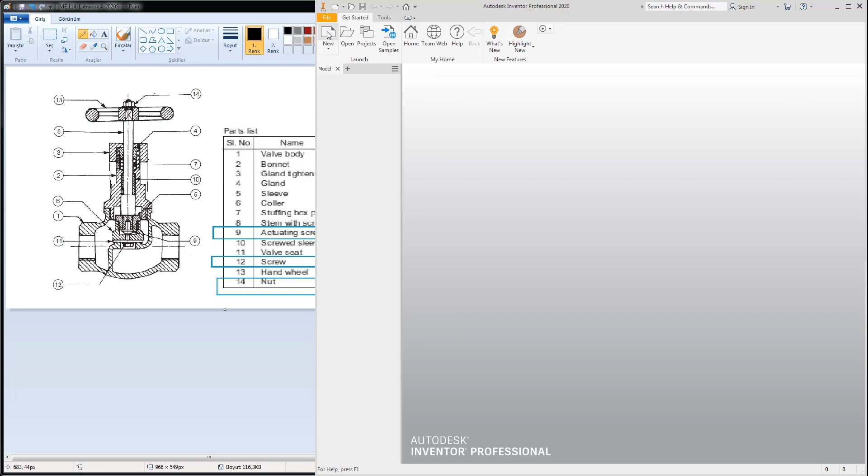Okay, the next thing we are going to start the assembly modeling. We have just finished all the parts. From this point in Inventor, I start a new assembly file, which is a standard millimetric IAM file.

Select this one and hit the create button. From the first assemble, use the place command and find your part files. My files are on this folder, and I will just select my parts one by one by pressing the control button.

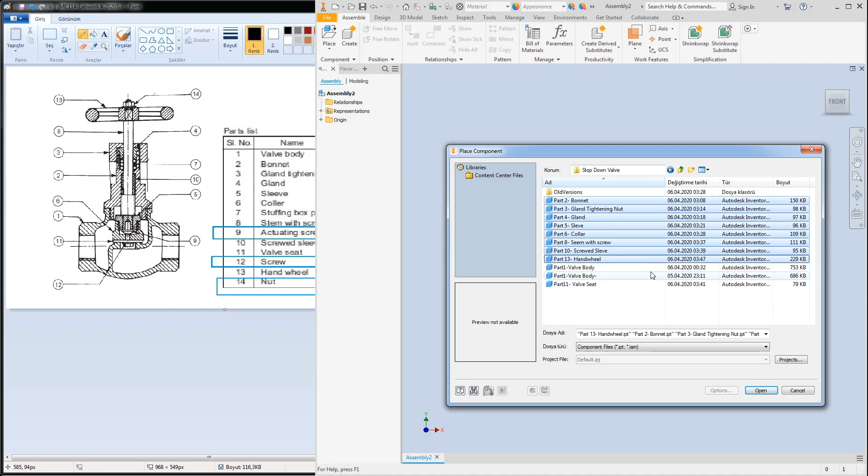Okay, hit open and select with right left click and escape. We have one copy of the parts here. Next thing, the first thing in the assembly side, we have to just make one part grounded first.

For this, I will just make this valve body. You can use right click and hit grounded, or use the feature window and hit the ground. Now I'm going to just fix this part.

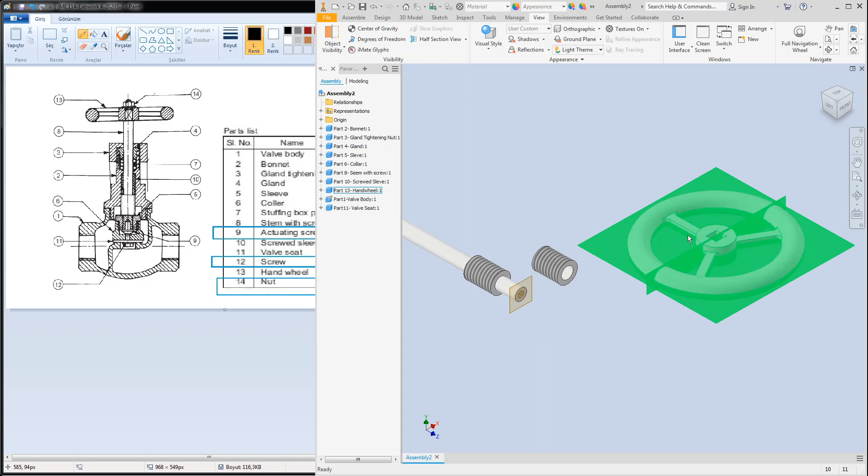As I have told before, most parts are cast iron parts, and also I'm going to make different colors. Before this, I will just change my point of view style to shaded with edges, to see the edge connections. The next thing I'm going to do is assign the materials.

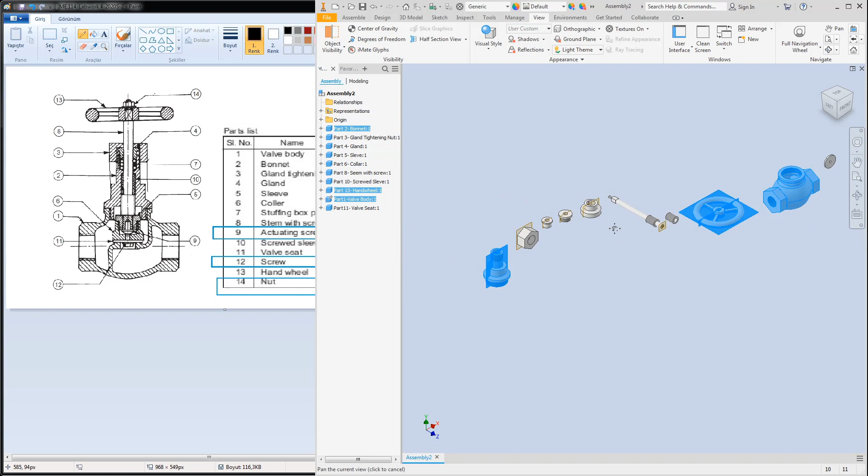For example, the body part is probably made up of cast iron. Also the hand wheel, these parts, the bonnet part here, and the other small parts are probably not cast iron, but normal steel parts.

I'll just go assign iron cast parts. When I have changed the material properties, it automatically grabs the colors.

I will just change the material colors as I wish. Yellow, that's this one, red. Also make this shaft green.

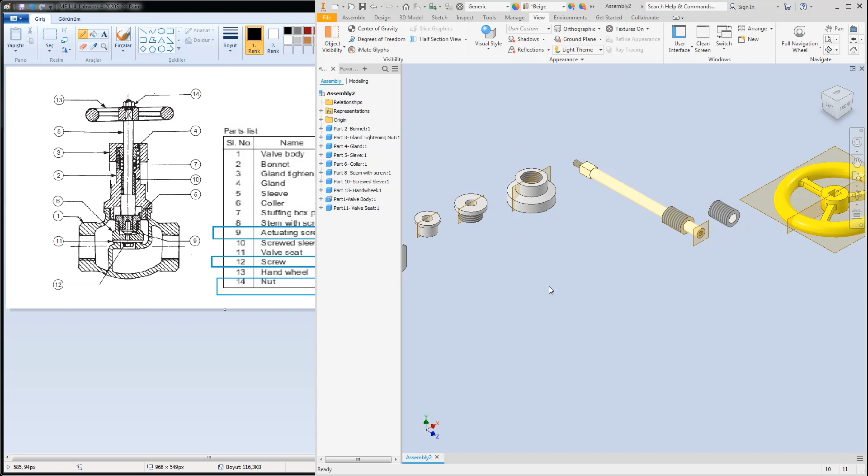Good, I'll just select beige. This one, orange. I'll just change the colors and I'll assign the other materials still.

Let's make these parts made up of normal steel. Okay, and change their colors afterwards.

White. This one, gray. This as well. Light red, let's say. Pink. Yes, so this one.

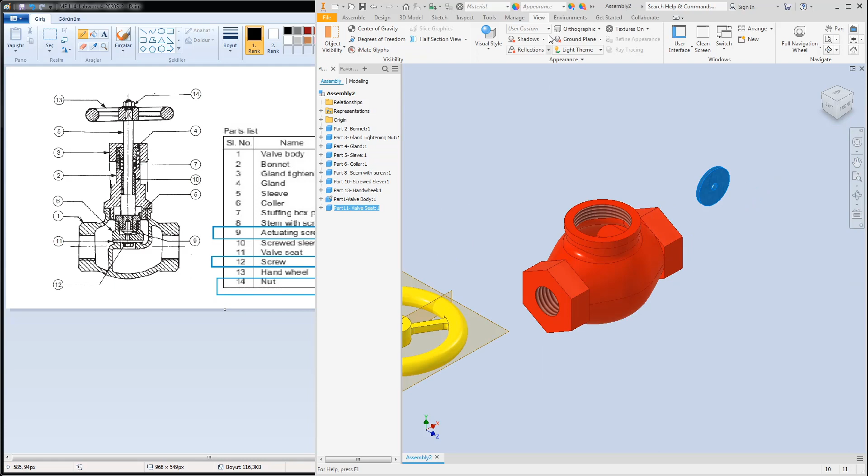White, or violet, no problem at all. This is the normal default, let's say, gray color.

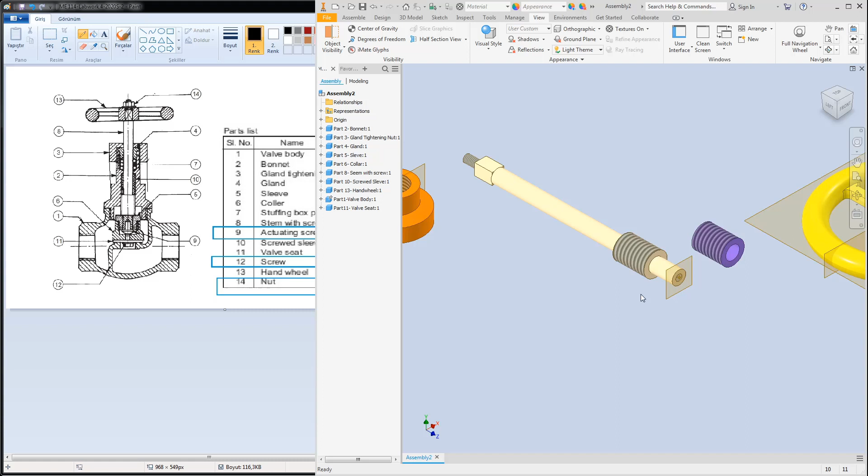Okay, we will just construct the groups first. As you see, we have the first body part, and after this one we just combine the parts on and on after. Here we have a part at this point which is connected to the first stem here with the collar part, which is this one, and we will combine these three parts to each other.

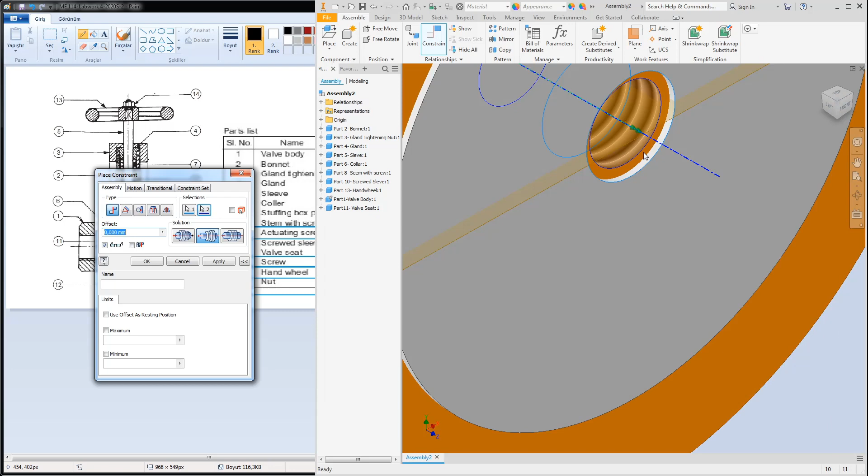Let's have the assembly constraint. Make the axes to each other. I'll just make also keep this axis to this axis like this. Make combine.

Inserting to each other, which is this surface. Again, this is our solution with the flush, which is inside. Also, I'll just keep these surfaces against each other.

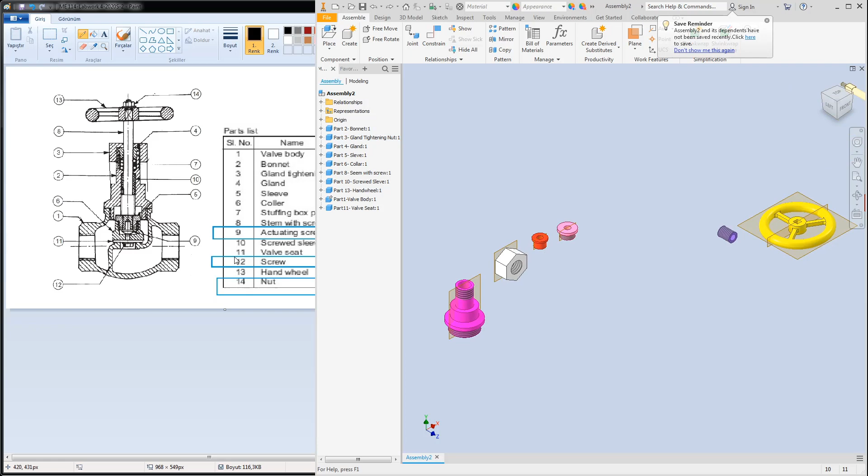Okay, I think we have a problem at this point. Yes, I'll just correct the first thing. Okay, yes, we have the number 5.

Let's look for it in detail. I'll look at the number 5 on this. Look for the part 5, the sleeve. Now just insert this part file.

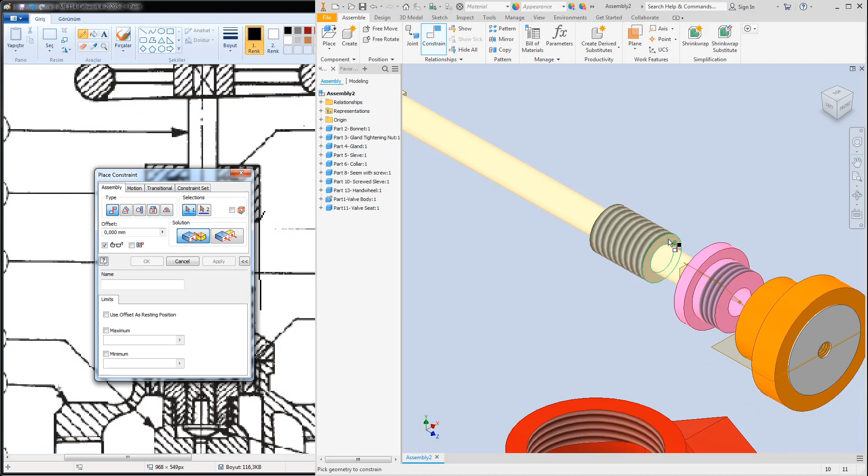I'll just change first, rotate this part around this axis and insert it, mate these axes to each other, and I'll just make the seating against these surfaces.

Also, I will insert this surface to this surface like this. Also, I will make this surface mate it. Okay, I will also use this axis to mount on our body axis.

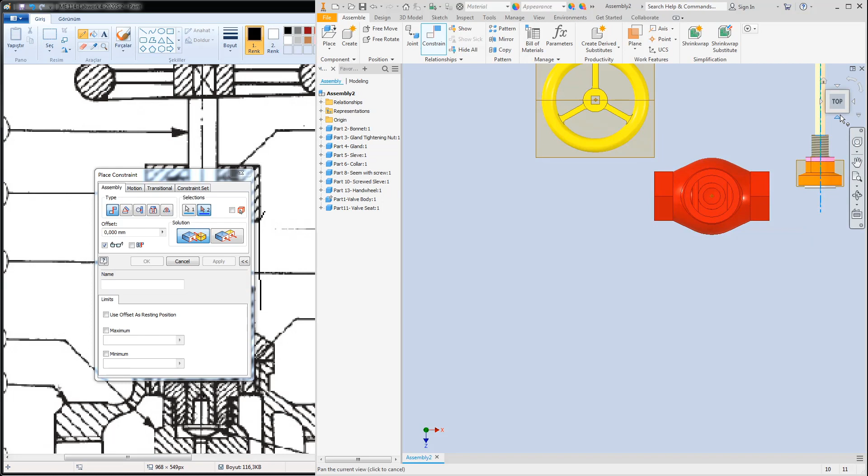Which I can see maybe at this point. For this, I will just look for it and open the XY plane visible to make a sectional cutout view.

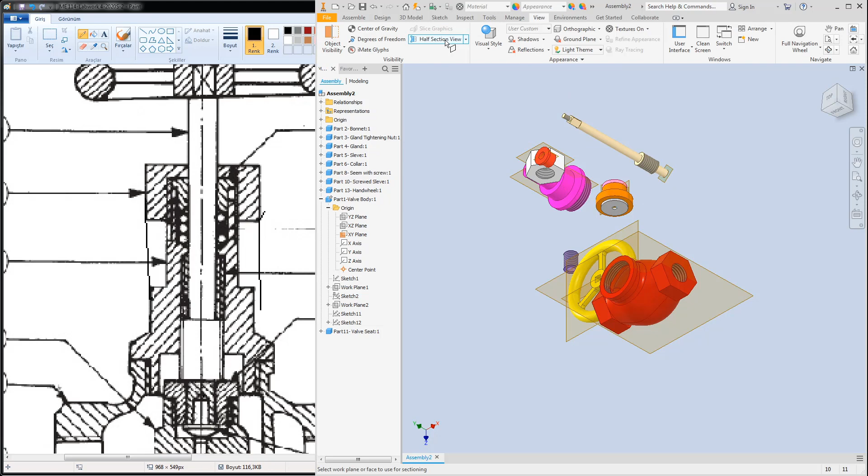From this point, I will just rotate this group around this axis with escape, hit the up, rotate this around this axis, and make the half section view up to this point.

And to see this axis, make the constraint this to this. Okay.

Here I have most of the assembly at this point, which is inserted at this point. As you see, I will just move at this point. I will just limit the seating position with the limits maximum, which is 5 mm.

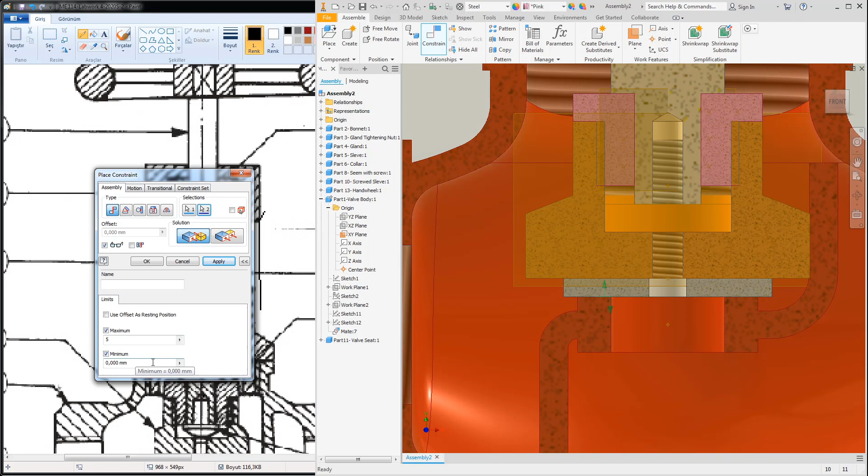It was mentioned in the beginning of this video lesson before, and make these conditions, and this is mated 5 mm in distance. Okay, we use this section, please enlarge your assembly constraint dialog box here.

Okay, the next thing we have the sleeve inside here. I'll just make the other group inserted to each other.

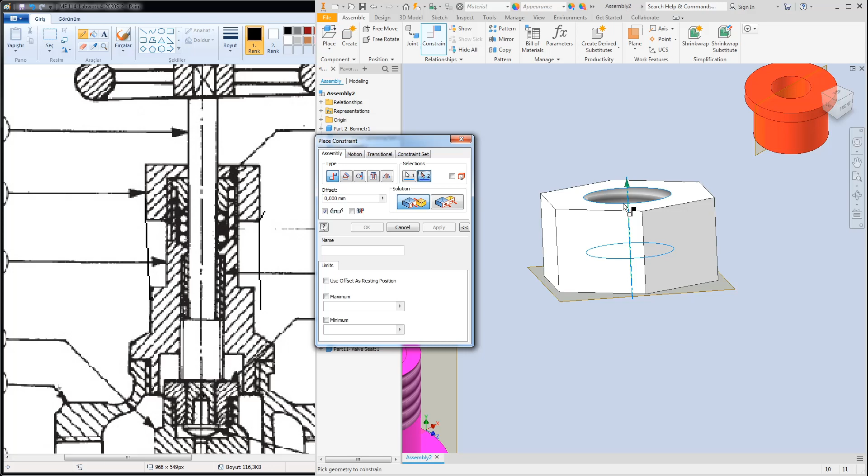Also, I'll rotate this cap, rotate or escape, and make these two axes mated to each other. Also, I will make these two axes mated to each other.

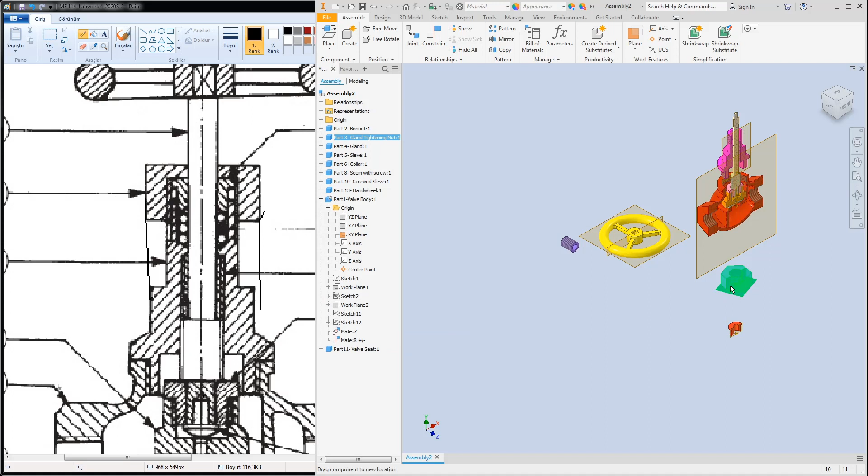I'll just use the same axes. Also, I'm going to use, I will just stick this axis to our part axis. As you see, we just use and move the parts this way.

Okay, also we have sleeve part. I'll just adjust to this part here. Next thing we have, and this axis for hand wheel, and we are going to just adjust from the top side.

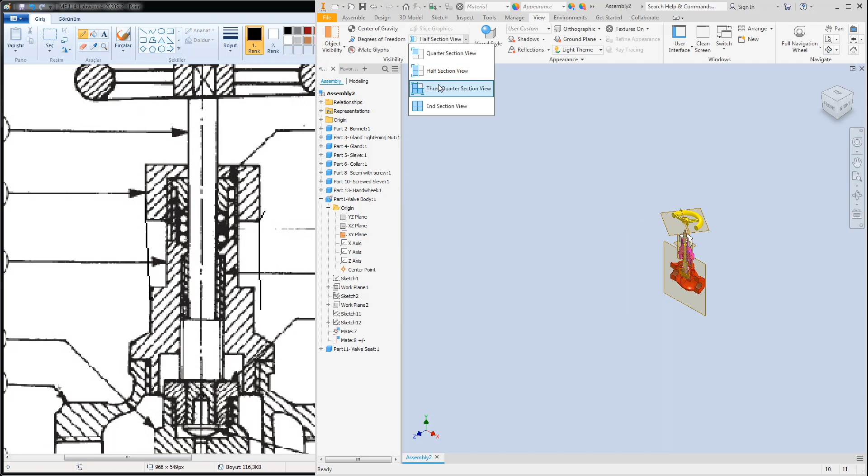Let's begin. Okay. We have the parts so far. We haven't left, I think, to just check if we have left any part from the other side.

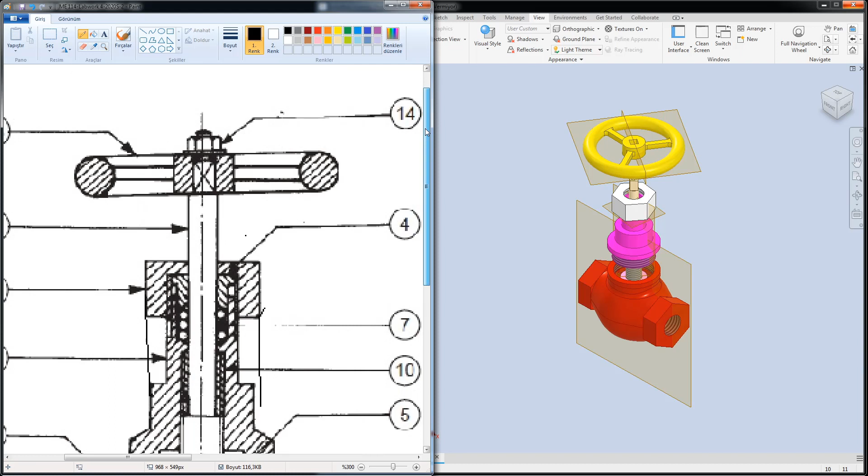Next thing, the first thing, from the top side, I will just begin to mount on it. We have a square here, and we have a hand wheel. I'm going to just make the first connection.

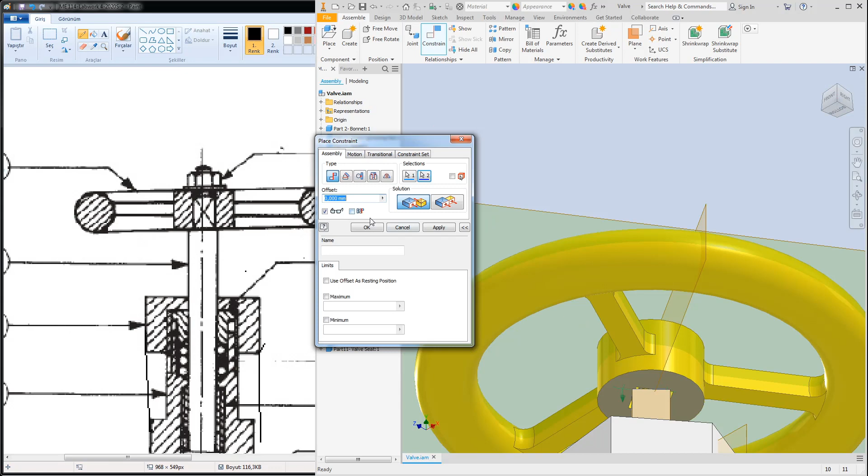Have the constraint tool, select this surface, have the back surface of the hand wheel. And also we have a rotational constraint. I would like to rotate with these two.

As you see, we have from the top side, it is not truly mounted, I think, because yes, as you see, we have missing constraint. I would like to have the inside faces with outside faces. I would like to have the angular constraint to body section.

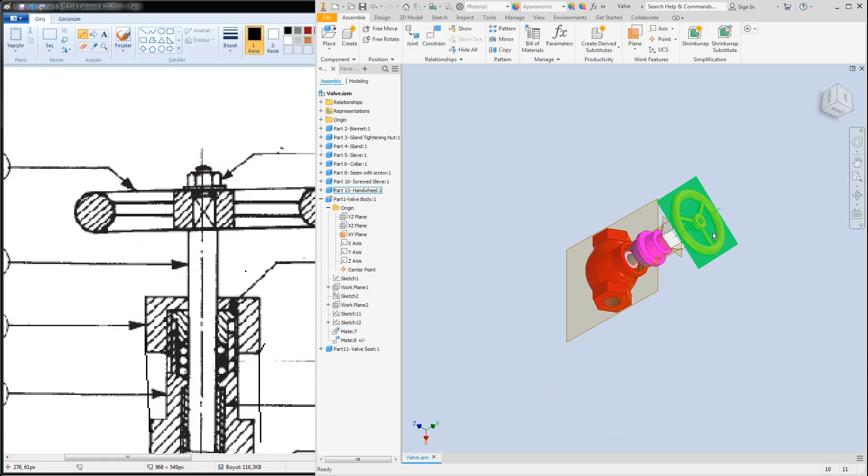Yes. This time our shaft is just turning with this two body part, as you see here. Okay.

I'll just turn this one. Also, I think I have made a mistake at this point. I'll just look for the hand wheel and make this deleted because I would like to use the other side, or make this move a little bit higher than this one.

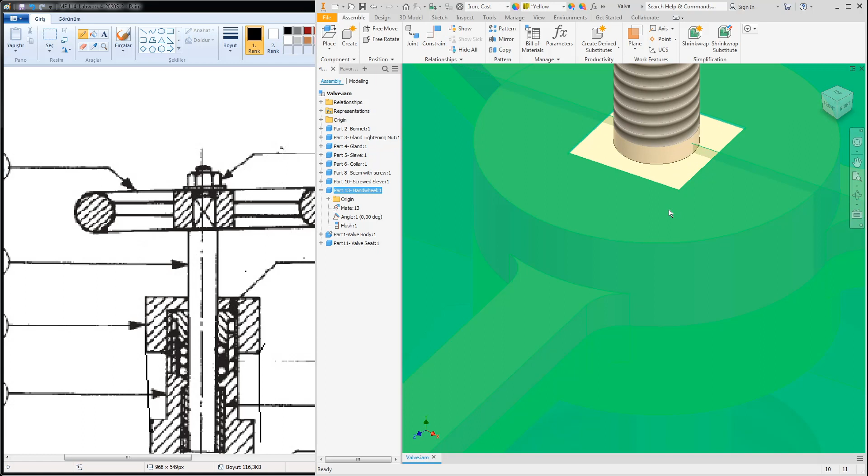Yes, like this. For this, I will just keep the surfaces flushed. These are turning together this time. We also have a washer.

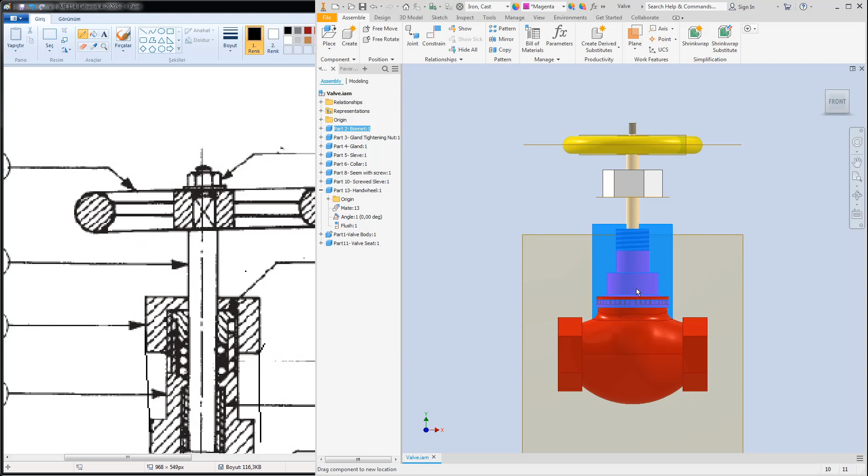From this point, we have made this group. We will just insert this gland packing. We have a gland part which is just the number four. I'll search that part by having a section view which passes through XY plane. Search the number 4.

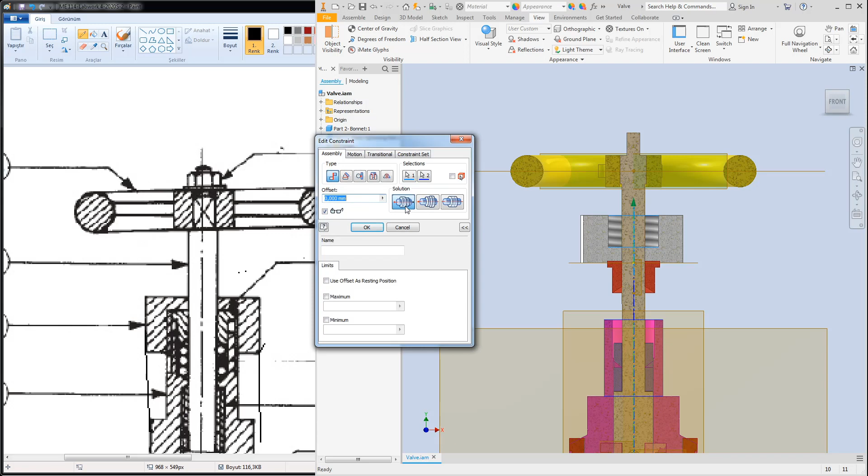Here it is, backside of this part which sits on this view. The cap, I have to just turn this cap on the other side. I will just change and edit this on the aligned version. Yes, and I will just make this blend straight on the back side of the part.

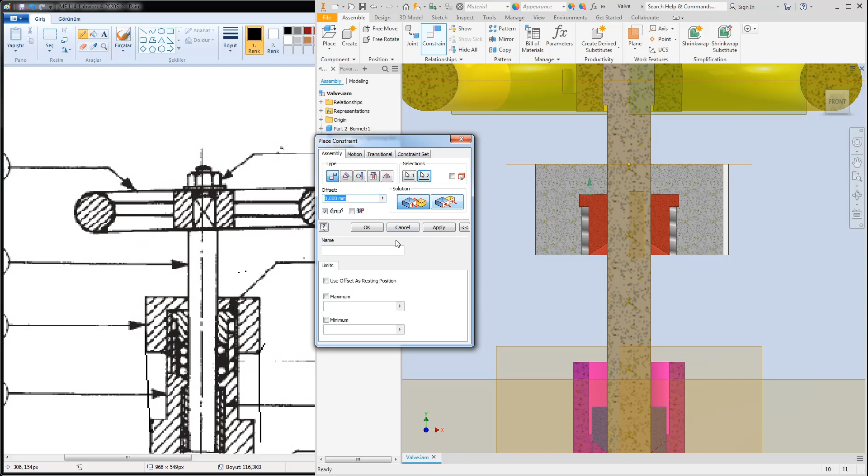For this constraint, I use the opposite surfaces. This surface will be opposite to this one, and I will just make the packing here, the number 2, the number 3, and with the number 4.

Let's go downside. We have a part 7. We are not going to make this part, but I would like to have that part in the part list. For this, I'm going to make an empty part, standard mm, and name it as a phantom part, which is stuffing box packing.

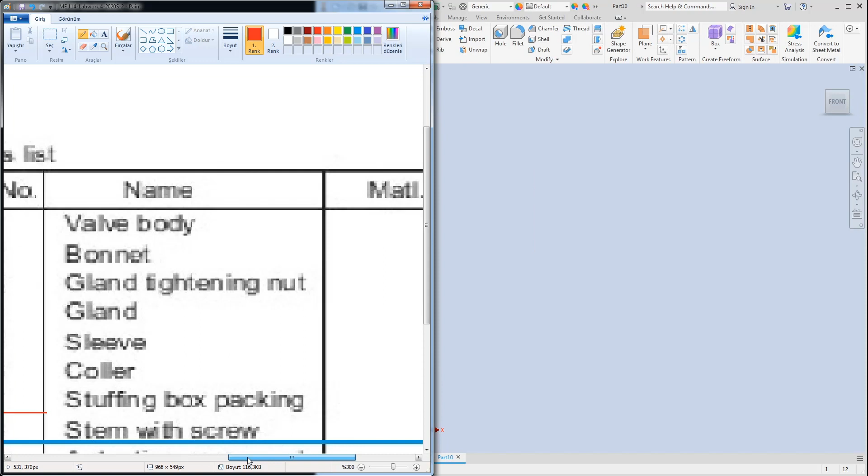Save this file with part 7, part stuffing box packing. Okay.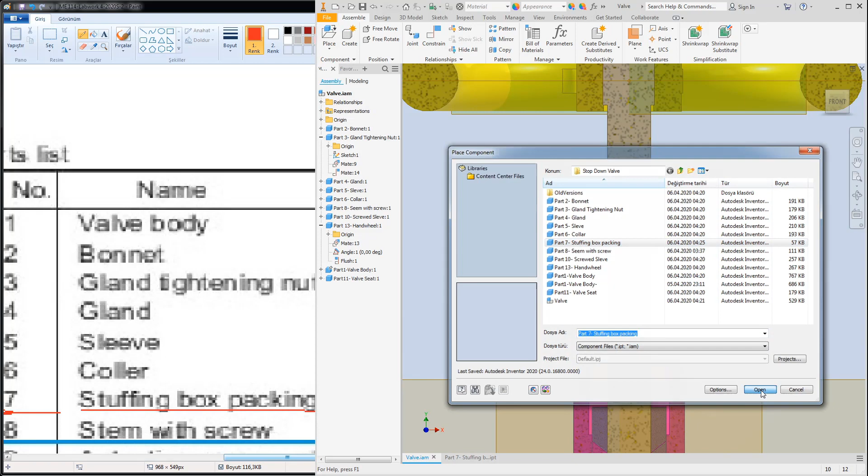Again, let's save this part file, open the valve assembly, and bring that part file also from place command. Although it's empty, just place with escape and save your part file. Assembly file, I'm sorry.

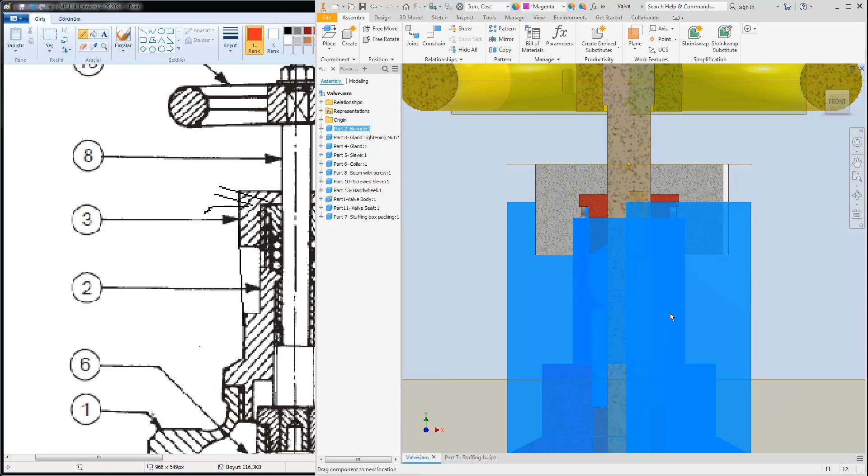After this one, we have the number 2 inserted between these two parts. Yes, like this. As you see, we have inserted these two parts into each other, like this, and make the squeeze at this point.

I will just make. I have all enlarge, expand all the parts, and close the XY planes visibilities and also center plane visibilities, starting from the top side.

I'll just erase these relationships. Make this one invisible. Make this one invisible. One by one.

So, we have just given the material properties, also the colors, to our parts.

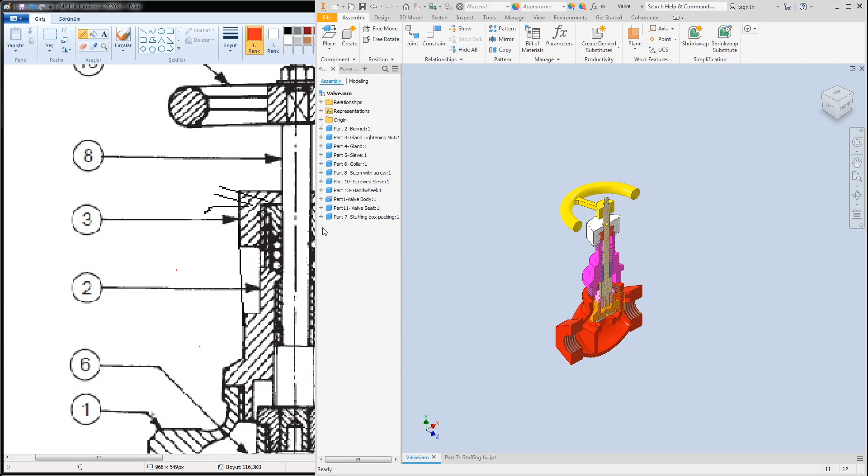XY plane, YZ plane. Just close the visibilities of the parts that we have. Now our view is a little bit much clearer than this.

The next thing, we have this gland, number 2, the bonnet part, sits on this group. I will just make these two surfaces align to each other.

Also, we have a sleeve part inserted at this point, which is around somewhere here. It is on the bonnet part at this point, which is this one, as you see, up to this point. Let us see.

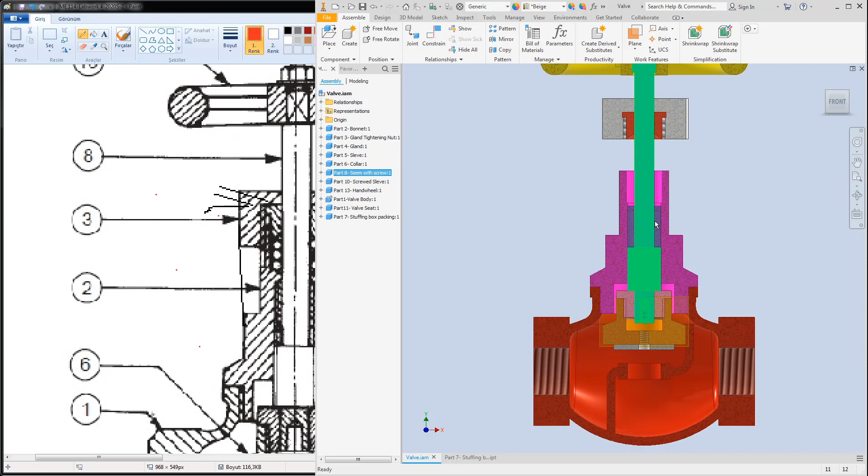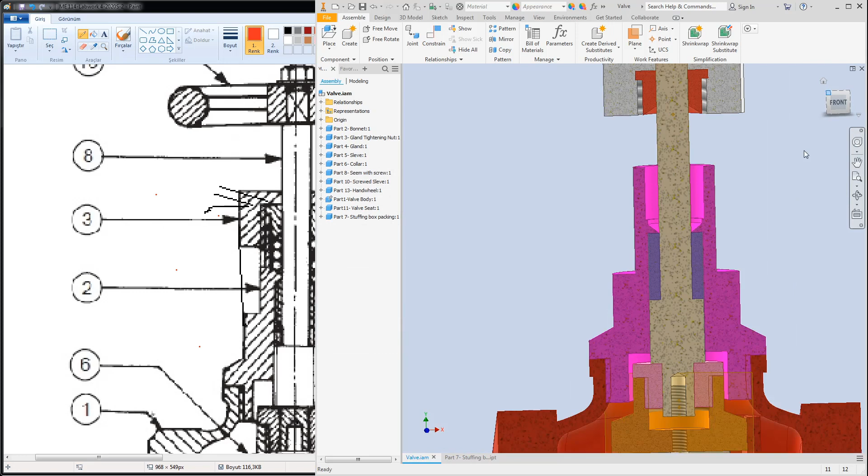So this, it is moving, but I need to fix this sleeve and use the sleeve surface. This surface just sits on this surface. Make the connection here. I will also just cover this point.

Constrain this also, sits on this part. I'll just connect the parts into each other like this.

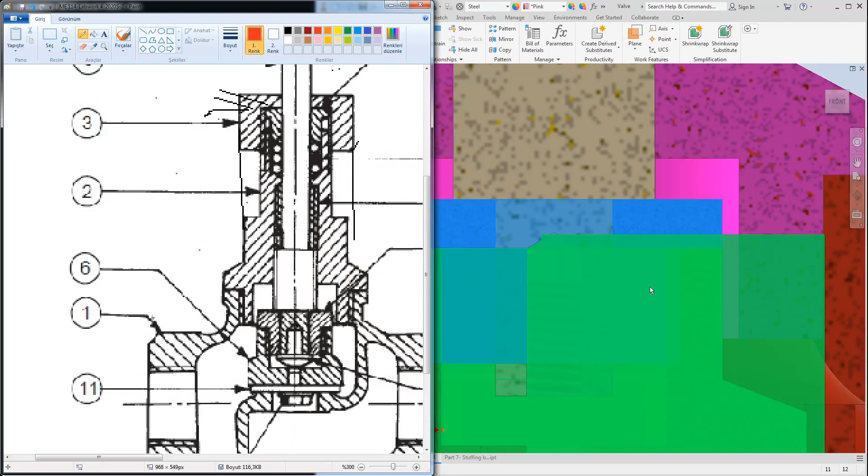We have also the connection around this one. As you see, we have an empty connection around this part. We also have the connections. The missing part, let's...

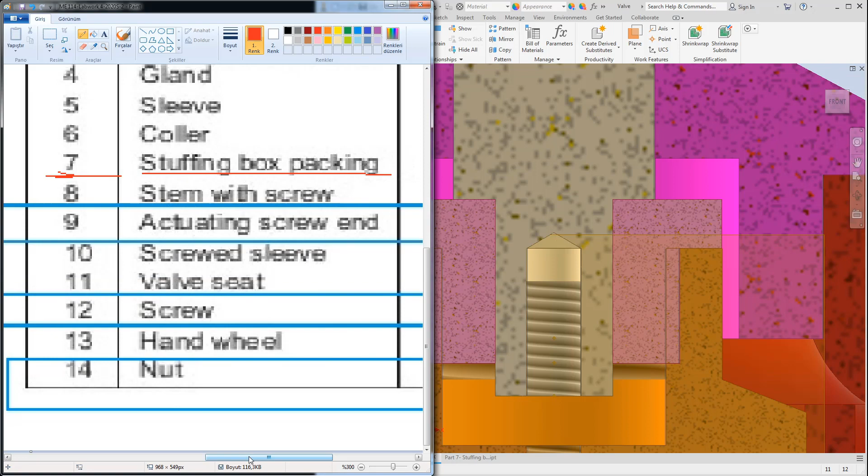Recall, save our file, all components, and recall the missing parts, which is the number 9 actuating screw, metric 4 at this point with 7mm thread. As far as I remember, I can use the measure tool to get that dimension.

From under the tools menu, we have a measure tool. I'll just measure the distances between the items. We have a 9mm and 7mm threaded length for our hole.

Let's place. This time for standard parts we use the place from content center. From the fastener groups we use bolts, rivets. We need the bolts. We have the screw, rounded head screws.

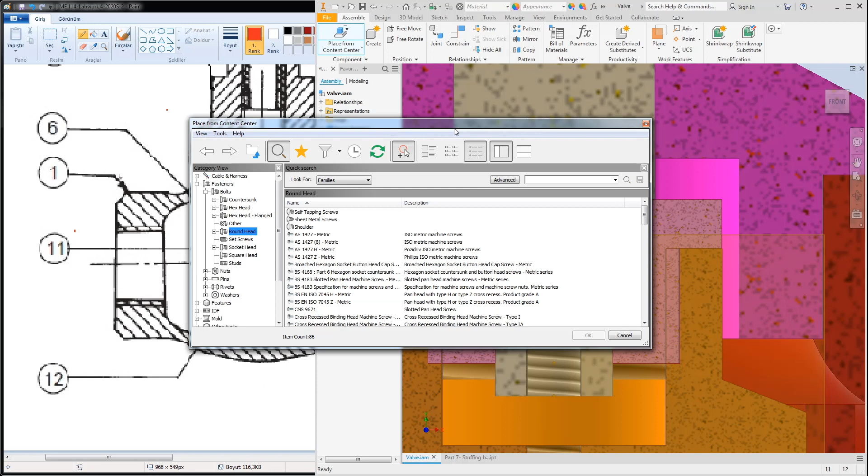Let's search for ISO standards. Screw ISO, this one with rounded head. All these rounded ISO standard. I will just select - it is not implied too much. For this reason, I will just select a normal screw, which is IE and ISO.

Let's say this screw, 7380-1. I'll just select that tool. Select this one first of all.

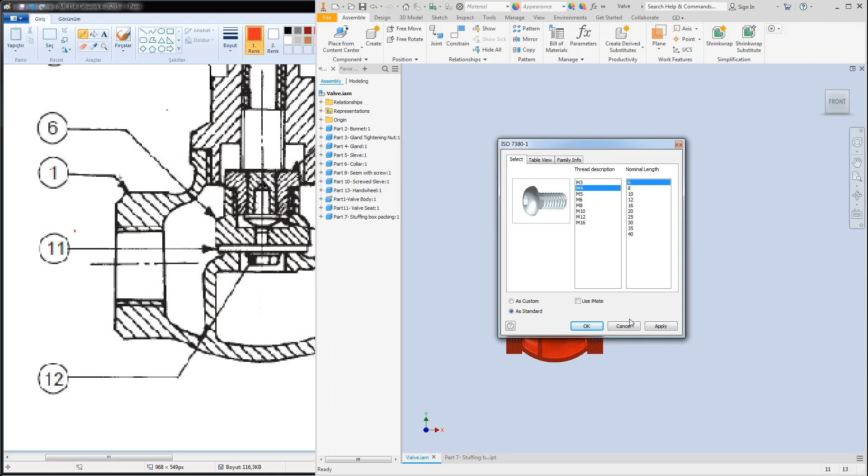It is implied with metric 4. You can just choose between these lengths. You can use also, we can use part file here around, let's say 6mm.

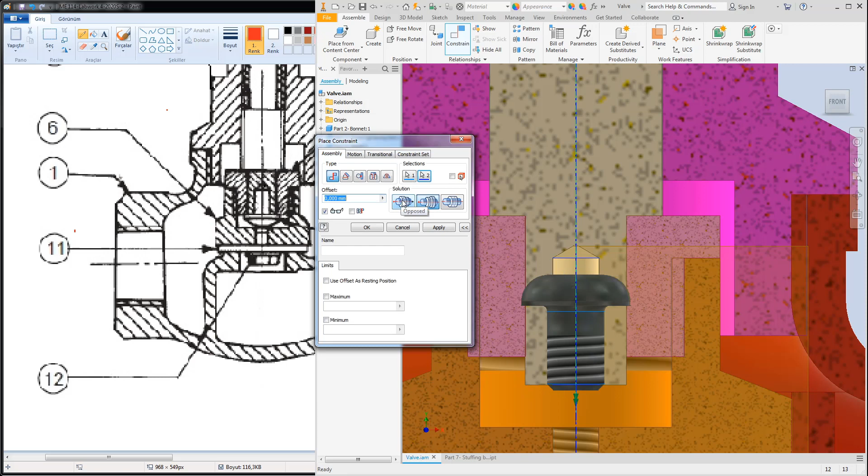One click, we have - I'm going to insert this part axis to the part axis, not this point. I've used the axis, changes the rotation, okay, and I'll just choose the seating point, backside sits on this point, like this.

Okay, but I can move this tab, moving these two.

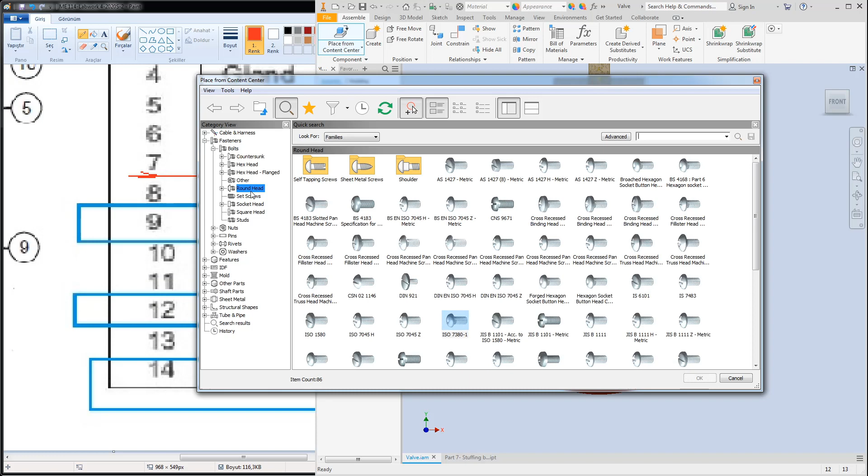The next thing, what I'm going to do is, we have 12 millimeter. This is a hexagonal screw. For this one, I just search for that one, not the round this time. This time, a hexagonal screw.

To make the connection between valve seating and this valve, this part. Okay, again, hexagonal screws. That's hexagonal cap screw. These are inch hexagonal bolts. Hexagonal cap screw, this time.

Again, with metric 4, if it doesn't have, let's select another part. Let's look for this standard. I'm not sure about this one.

Make a selection only. Yes, we have metric 4. The shortest one will be enough for us. We have this connection. Escape.

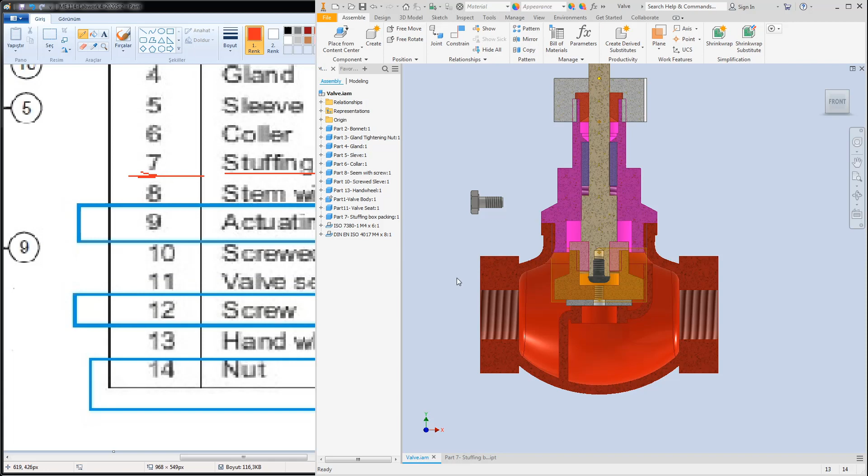Again, I'll just set the axes first. Then we just combine these two parts to each other. Also, we can use the same part mounting to each other.

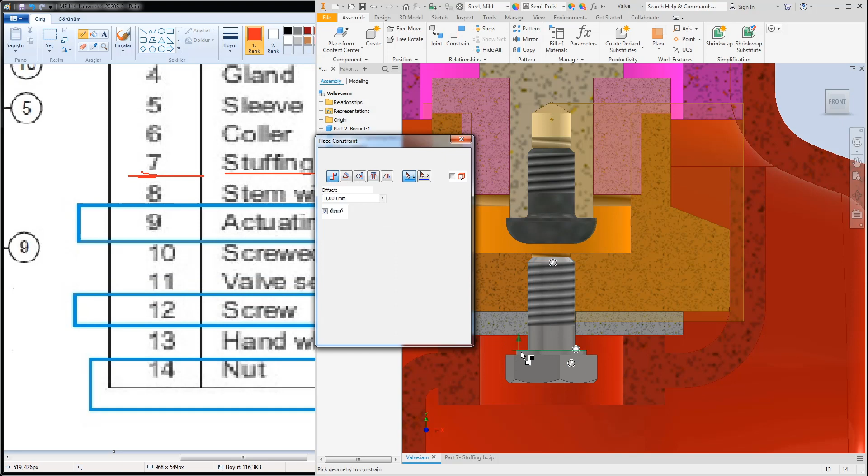Again, constrain this point to this one.

The next thing, we have a nut on the top side, which just connects our hand wheel with the nut. We also have to have a washer on this top, but it's not implied at this point.

Place from content center. I need a nut this time. Normal hexagonal nut. Normally we have 4032. Yes, this one.

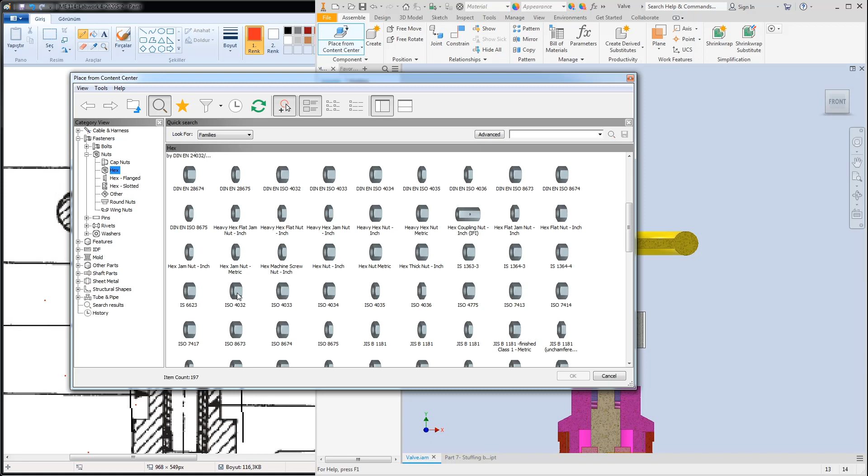4032, which is the metric one. ISO 4032. I have this one with size metric 4.

Just insert it. For this connection, I will just look for it. Again, stick to this point. I will just adjust the seating position, which is this one. Turn this face.

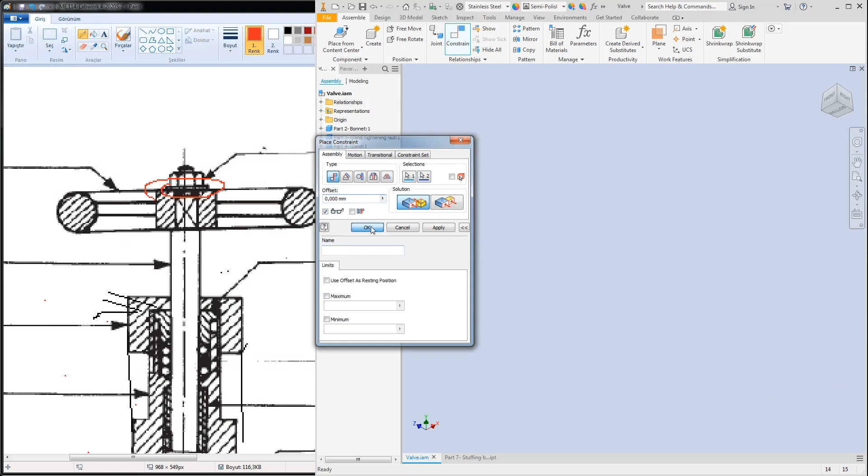This is our body part mounting. We have just adjusted all the equipment onto each other. We have squeezed and limited our movement like this. We can also prevent this rotation if you want.

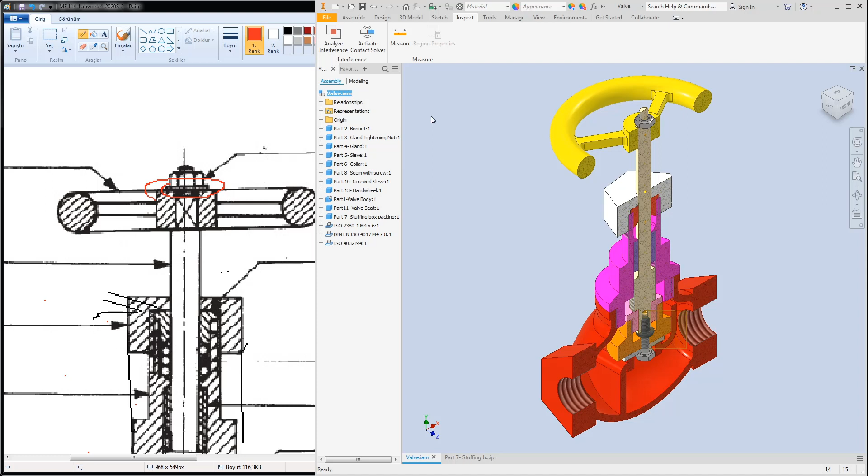We are going to continue with the body parts. Before that, I want to show you the inspection mode, which will analyze if we have any interference in our parts. For example, we sometimes may have faults in our assemblies causing interference with each other, and we can check this interference using the inspect tool.

We first have the analyze tool. Select everything we have in our assembly, and we'll make the software analyze the interference connections. Here it tells us this part, body part 6, collar just coincide with itself.

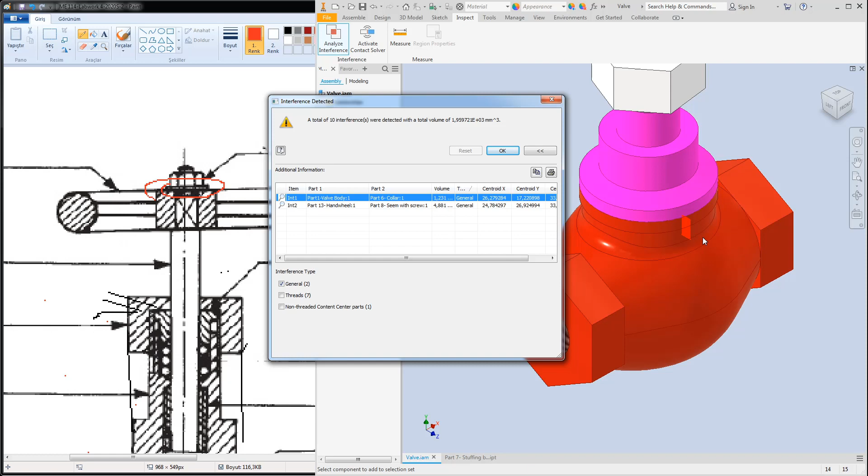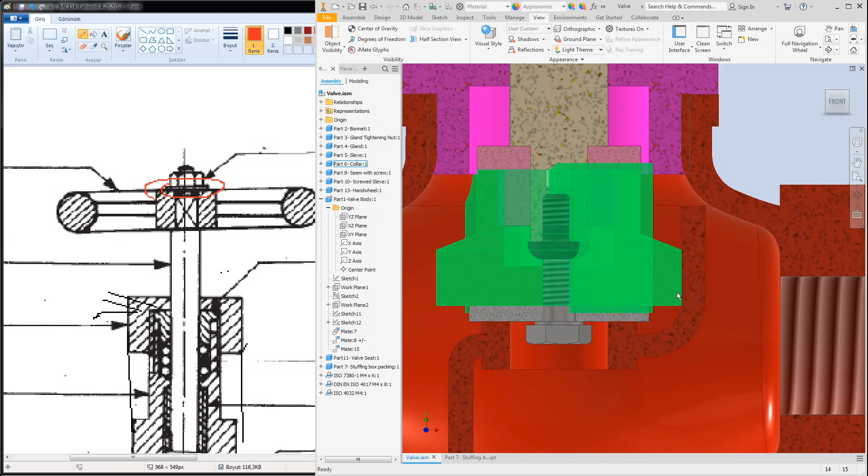I'll have the half section view again, and I'll select both body XY planes to see where it coincides. As you see here, we have an interference at this point.

For this reason, we may have to change our design dimensions. For example, again, use the Analyze tool. We select again the tools and define the sets.

Select the half section. Let's save the view as section. I'm sorry, let's change this view name to section.

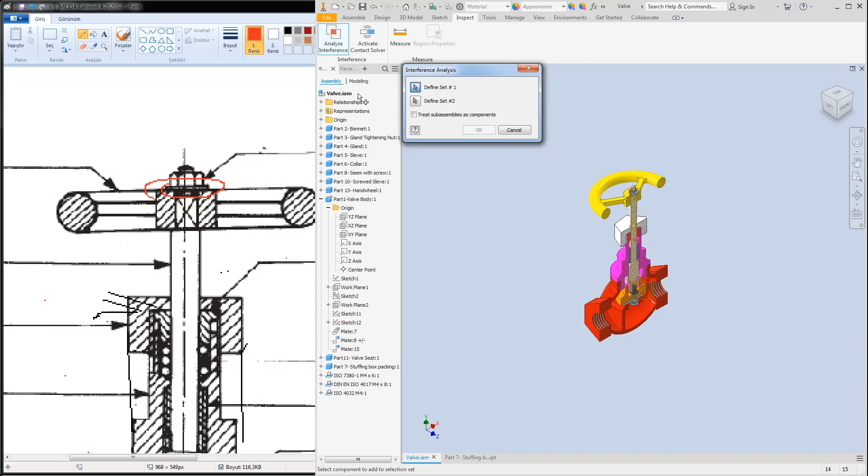Save the part file to the assembly file, and use the inspect tool. Define the set between the parts. We select all the parts in our assembly, and we have two interferences at this point.

We have one with the valve body which interferes with each other - this is the hand wheel to part 8. It interferes, so it's not important at this time. We can correct it, but we have a problem at this point which we need to correct first.

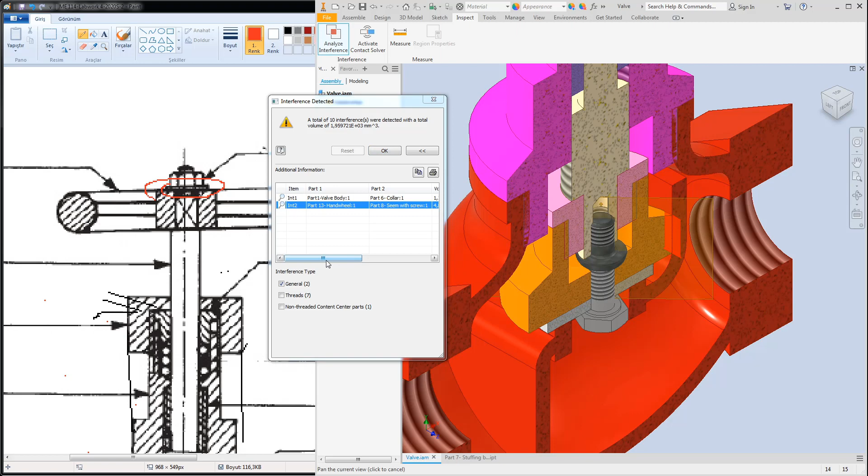We can see the details, the volume size, how many millimeter cubes they overlap with each other, and you can also consider the volumetric interference here. We have a very small amount in these connections. We also have some thread connections with mating threads, without mating threads, and non-threaded Content Center parts. We can do a great interference analysis here.

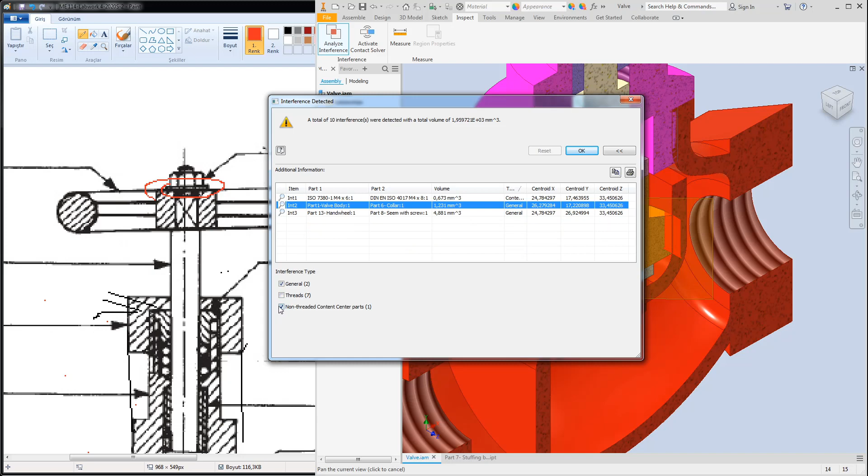This time it's enough for this one. I have saved this file, and after this I'm going to start a standard millimetric part here for the presentation file. It asks me to select the stop down valve.

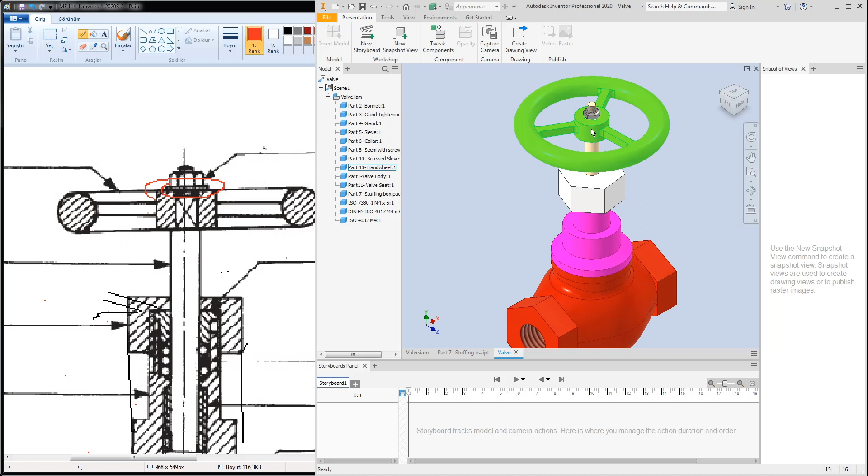With the animation, I would also like to have a sectional view. Let's first create the exploded view. We select the components, which are this one. For example, we first make the tweak, take the hand wheel, and move it in this principal direction.

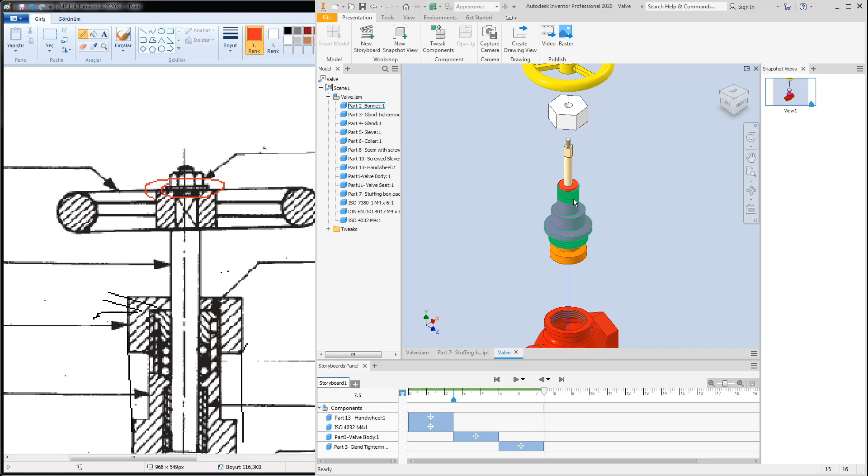I have this one. You can also - I'm going to make the other valve. First the body part, I'll move it downside. Also, a new tweak component using this way, and the other parts I'll have this view.

Save. I'll make the tweak. I have accidentally created two snapshots - this is not the snapshot I'm looking for. I tweak the components, two components. I'll select with the control button and move to downside.

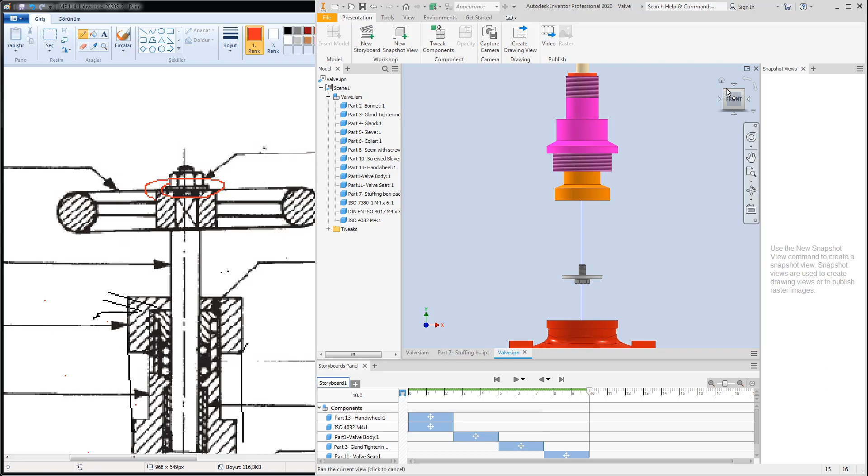I would also like to have another tweak to make the bolt view clear. I'll move these much further to see in isometric view. Also this gland packing from the top side, I'll insert it up to this point.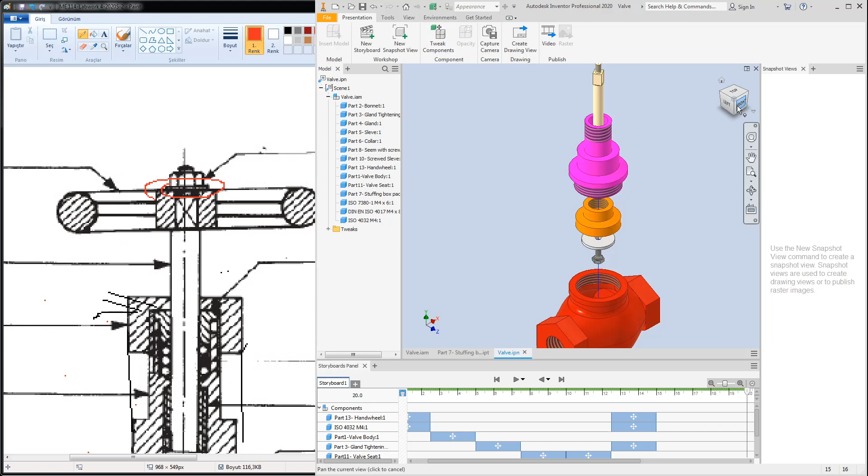Here I have - I'm sorry, this is the cancel. Another tweak component to the bottom side, like this. From the front view, I'll move to downside, which is this one. Also, I'll move two parts - this part to the back side, down, and the stem to the top side.

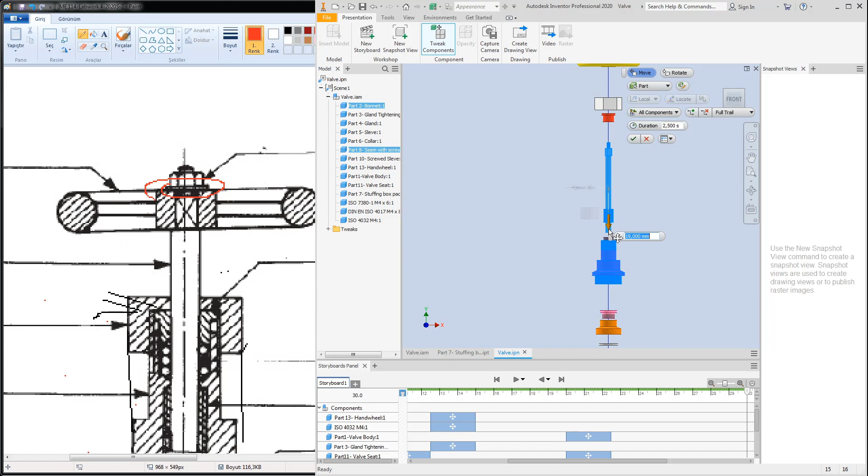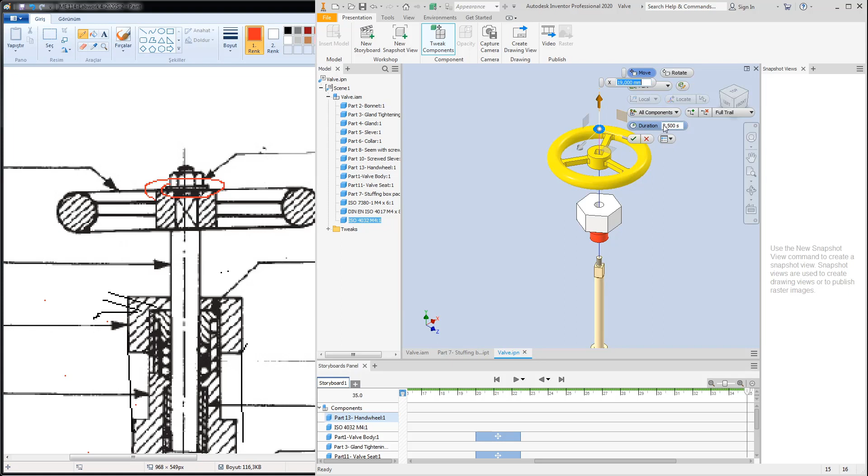Also, I would like to have this view, this part to the top side, and this sleeve, and this part with control button. I'll just move them down and move the stem with this principal direction, like this. I think the exploded view is a little bit clearer this time. I'll just create these views. From this, we can change the opacity, as you see.

But we will just do this in another storyboard. For this, I'm just going to make a new storyboard and make the clean type. I'm not going to start with this one. I will just make a new animation here.

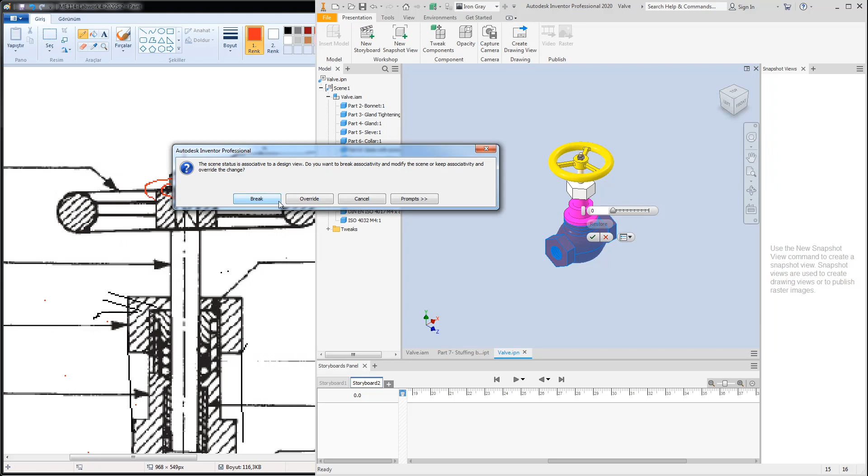For this, I would like to see inside of this part and change the body part opacity. I will just make this opacity override, which is I do not want to see too many things inside. I would like to have an animation to show what we have inside. Also, I would like to see other parts. Watch these again, this one.

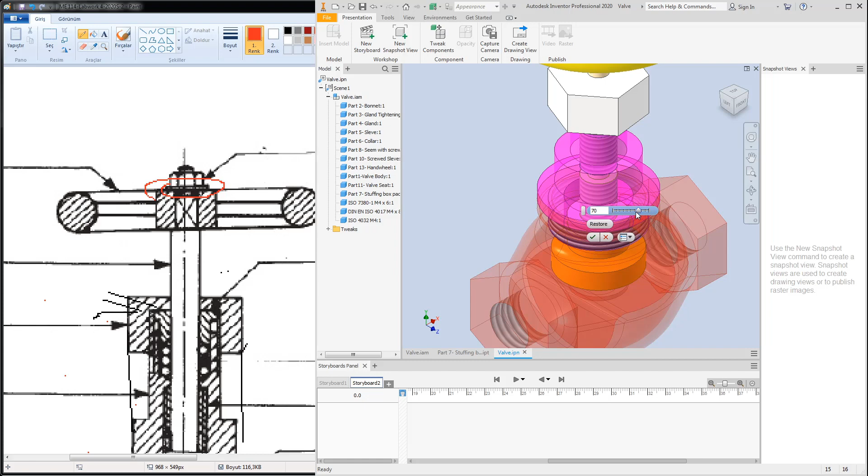Right, and I will just drop down to have a transparency view to see what's inside. Here we have a 5mm in stock, and I will just make the move animation move with this one. I will just use the tweak component, select these two components, also this one, by rotating, and when I'm creating a rotation with angle, let's say 1000 degrees.

Also, when this group is turning, I would like to take move for the upside in positive Y direction. Also, I would like to again create this group, select this group, tweak by moving again. I'll just select this group, a tweak.

This time, not rotating, we are moving, and sorry for this one. I would like to have the duration for 2.5 seconds. I would like to just make the 5mm move on this point. Select components with 2.5 seconds. I would like to go up minus 5mm on the negative Z direction.

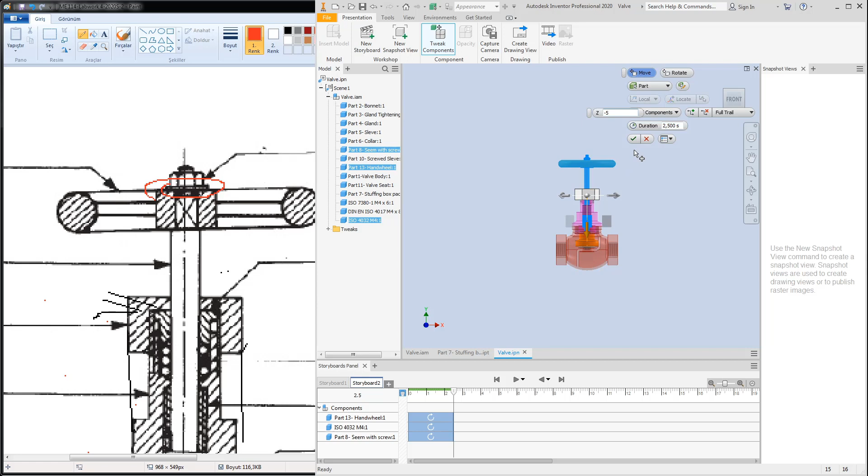Which is on the Z axis, like this. We have a combination like this, a combination movement. But this time, I would like to have the same movement at the same time. For this reason, I will just extend this storyboard and adjust my component views

and movements simultaneously, and move these. Move this one. While moving, it just goes up like this. Also, I would like to move the other parts together with these and add this movement. Let's start the animation. It's also moving, and I will just make the move on the other side.

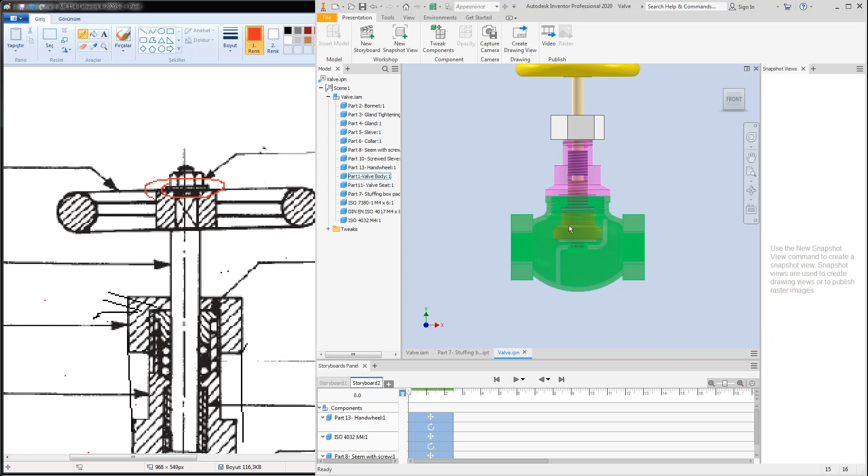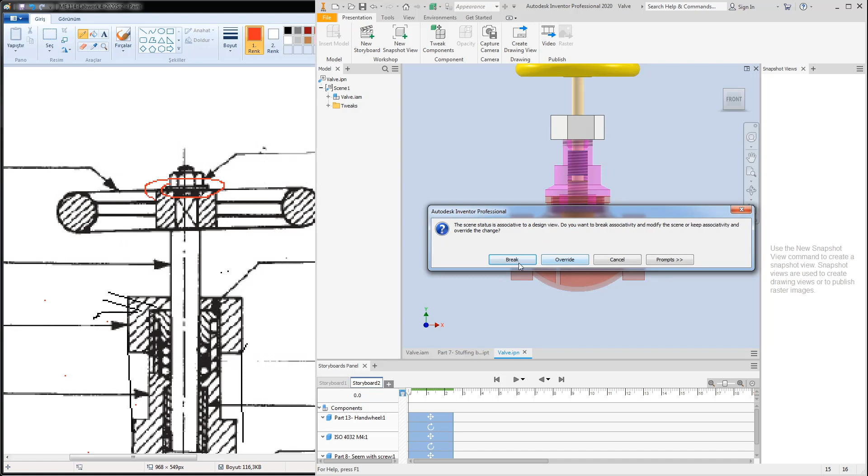Just hide first the visibilities. Cancel this one. Make the visibility. Let's break, also let's break. This time we will just add together.

Also, I'm going to make a selection and insert the same movement to this section, this group, with these moving group tweaks. And this time I will just add, just select, unselect, edit tweak,

and add the other components as well. This one, this one, this one. Also, we have another at this point. These also can rotate at this point. Let's just animate again. We use the same thing as you see.

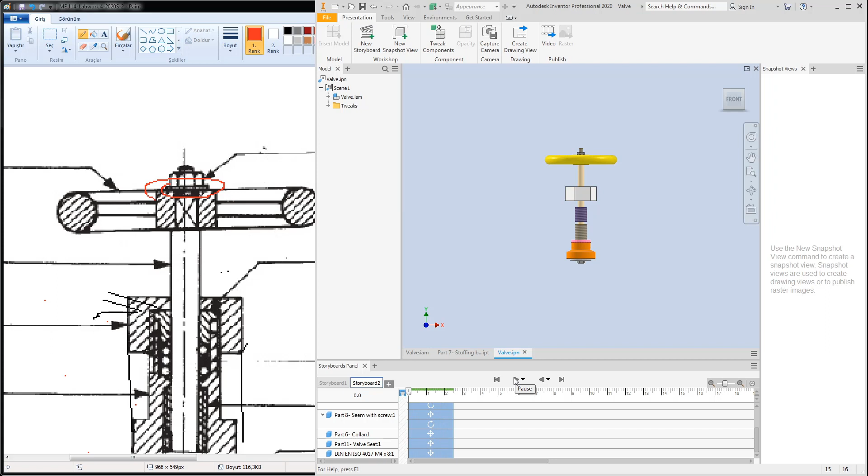We use 5mm movement. We again make the visibility of these two parts. Also, we change the opacity again. Okay, this one. Also, this one. As you see, we have the movement. With this movement, we have an animation.

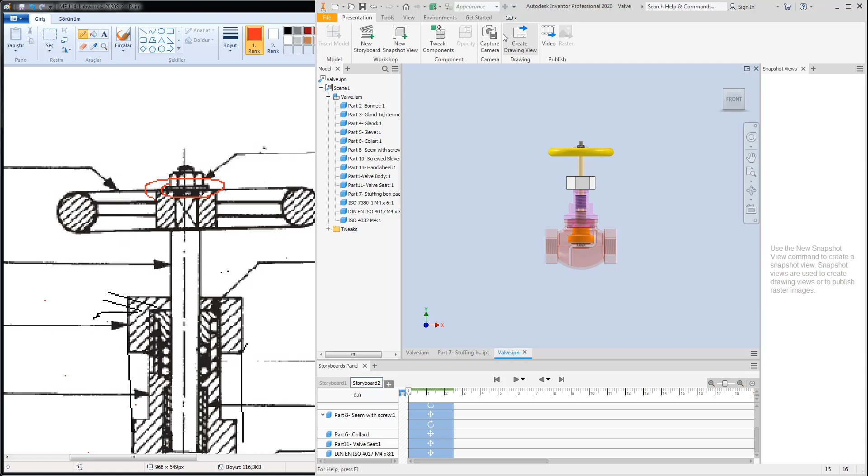We can just capture this video by selecting storyboard. I'm just going to change my directory, which is the gate valve application, and I will just save the file in this group, this animation, and it is completed.

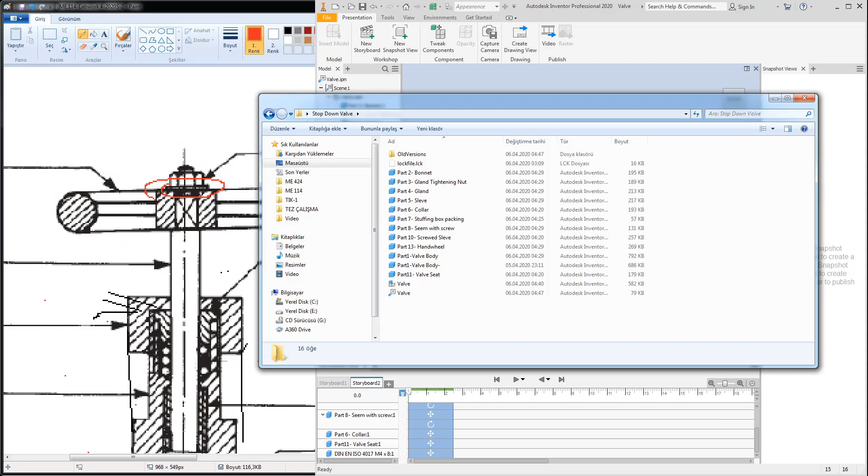If I have opened this valve again, this time I will use... I cannot see this one. Again, just check the video folder here. Yes, I think I have just saved somewhere else. I will just go and find the story.

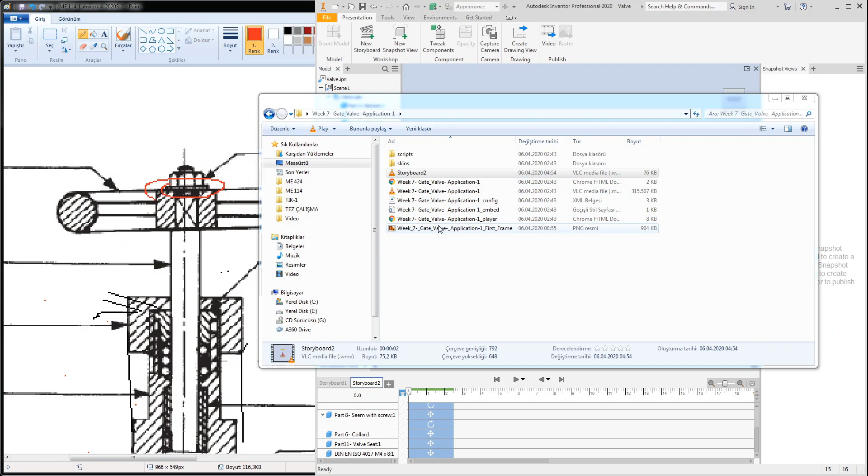Again, I can just create it. This is very short this time. Okay, gate valve application 1. I'll just save somewhere else. I will just find this folder. Yes, this is the storyboard, the animation. This, it's a very short animation.

I'll just see. You can also save your camera to make the section, to make the story much more like the film scenario. You can just make these scenarios as you wish. Okay, we will continue with the technical drawing side.